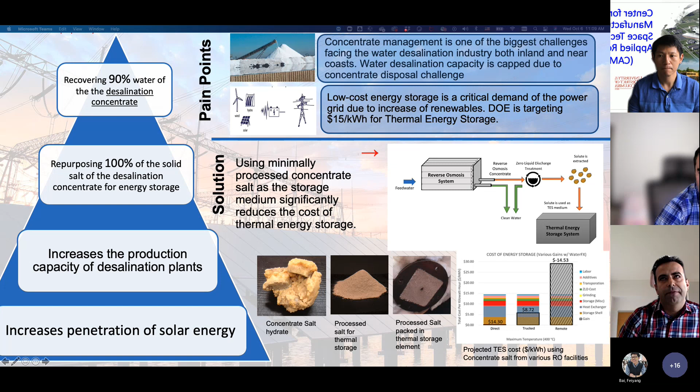If this project is successful, it will lead to more capacity for desalination plants, and it will also lead to cheaper solar energy. Now I'm going to dig more into each of these problems that we're trying to solve here.

The change in salinity affects the pH, of course, and it harms the wildlife. Without access to the ocean, concentrate disposal is a bigger and more expensive problem. The cost of disposal in areas without ocean access can be from 5 cents to 25 cents per gallon, according to Inland Empire Brine Line, a company that disposes of brine in Southern California.

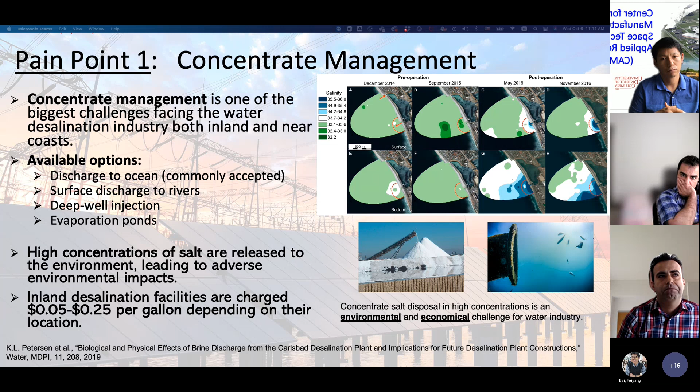Now I switch gear and talk about a totally different subject, and that's the need for low-cost energy storage. As you know, the future power grid will rely on intermittent renewable sources as we move towards more solar and wind. For example, California and 10 other states are targeting 100% renewables by 2050.

In fact, California requires an additional 50 gigawatts of long duration storage for keeping the power grid stable, because there are two different issues here. One is the intermittency of the source of the power, and the fact that there is overgeneration in the grid during the solar hours, and the need for storage during the peak hours.

A storage device that we could have like this would store the excess energy, whether it's solar or excess electricity in the grid, or the industrial heat that is wasted from a power plant, that can be stored in a device which can later on either generate electricity or generate heat for use.

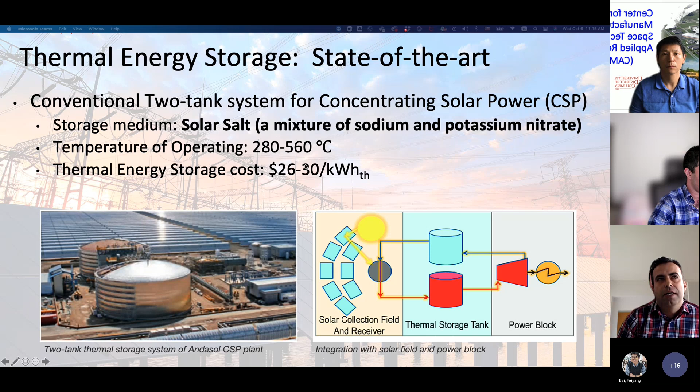Now, there are some emerging technologies which are very interesting to me, and it shows that there are some potentials for marketability of devices that store energy.

So the emerging technologies in the field of thermal energy storage are developed by both big companies such as Siemens and small companies such as Element 16. They are vastly different in size, but they develop, or are developing, energy storage systems that are very similar. This fact suggests that there's a good market potential here.

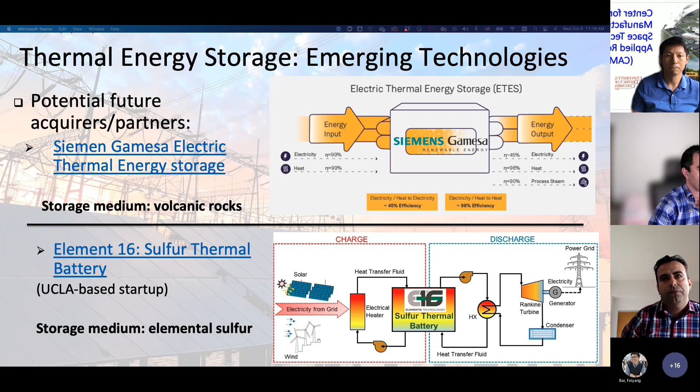So now moving on to the market trends for thermal energy storage. Market forecasts suggest that the thermal energy storage market, both in the US and globally, will steadily grow over the next decade. This fact creates a huge potential for projects that try to use thermal energy storage.

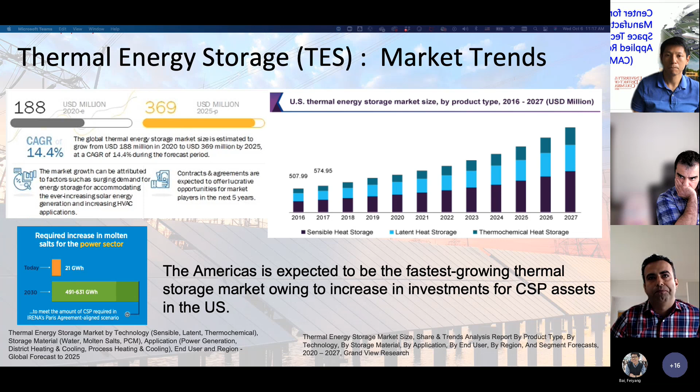Okay, so this slide kind of shows under the hood of what we're doing in our project and how we repurpose the concentrate salt for thermal energy storage. So the desalination concentrate is introduced to a zero liquid discharge system, which will reclaim additional water.

So if this is our reverse osmosis facility, the feed water enters, and the brine or the concentrate is received here. There's good water generated, which is not really what we care about at this point. We get the waste here, we further process it through zero liquid discharge, get additional water, and extract the solid salt.

Then the solid salt is processed in a series of steps to enhance the heat transfer and thermal characteristics of it, both to increase and decrease the thermal conductivity for different layers inside the salt tombs. The processed salt is added to a corrosion-resistant concrete, and a heat exchanger is implemented in the salt, as you can see schematically here. The salt and the heat exchanger are sealed to form a thermal energy storage module, or a salt tomb, as we call it.

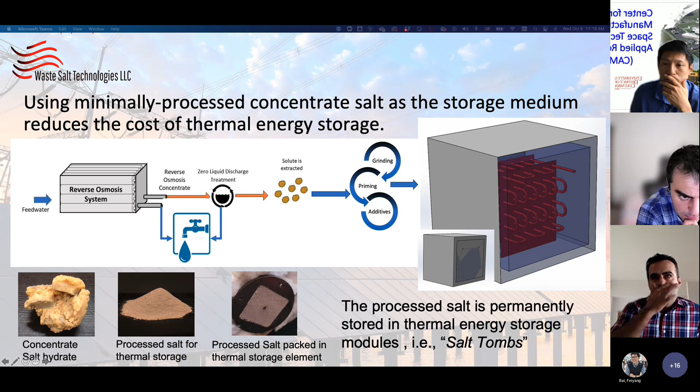Okay, so to wrap up, there are good benefits of using concentrate salt as a thermal energy storage medium because it saves the planet, it prevents desertification, and it enables very low-cost energy storage. We can repurpose it by minimally processing it and storing it, preventing it from releasing to the environment. It has inherently negative cost because there are no major applications for the concentrate. In fact, it's a waste material that companies pay for the disposal.

But the salt is very highly abundant, of course, inside the concentrate, and it's very chemically stable. Some of the salts extracted from the concentrate go through phase change from solid to liquid at different temperature ranges, and that provides higher energy storage density.

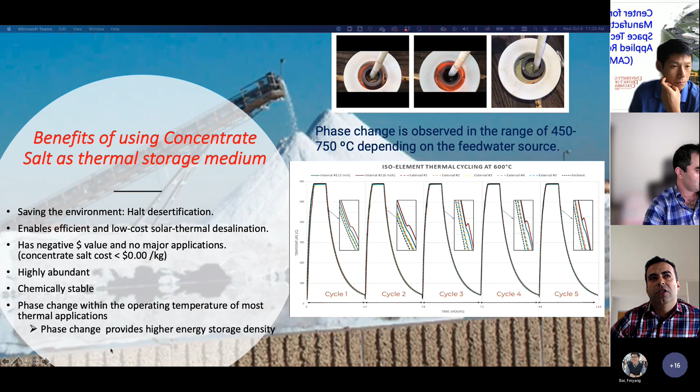Okay, in this slide, I would like to provide the history and vision of the project, where we started and where we are. We started testing the feasibility of using concentrate salt as a thermal energy storage medium back in 2018 with the support of a Bureau of Reclamation Science and Technology grant.

We expanded our work after receiving an additional grant from the Bureau of Reclamation to develop a lab scale demonstration and further refine our techno-economics model. At this point, we are trying to raise money, apply for funding so that we can have a pilot scale demonstration of this concept. And that's something I'm currently working on.

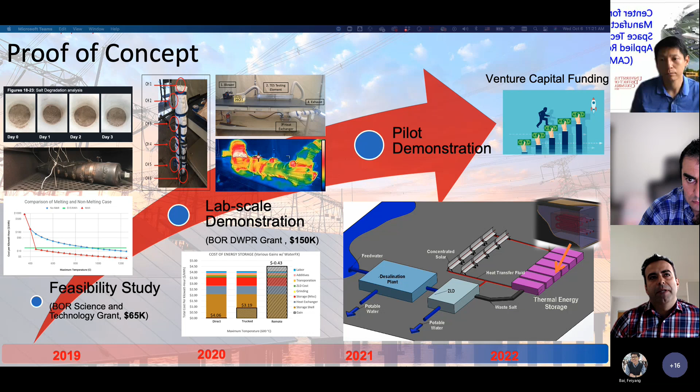So now a little bit more on techno-economics and why it makes sense economically to do this. The cost of any thermal energy storage system you can imagine will include the cost associated with the storage material and the cost associated with the containment.

If we imagine water as a storage medium, which might seem obvious, the cost of the containment will be very prohibitive at high temperature, while the cost of the water would be very small. In the conventional solar salt systems, the cost of the material dominates the cost of energy storage, while the cost of the containment is a lot smaller compared to water due to lower vapor pressure of salts compared to water.

Concentrate salt or waste salt after processing has a negative cost because we essentially receive that waste brine, waste concentrate, and charge the desalination companies. It has a negative cost that reduces the cost of thermal energy storage, even if the required processing costs of preparing the waste salt are considered. In the next slide, I'm going to put real numbers on these charts so you can get a better understanding.

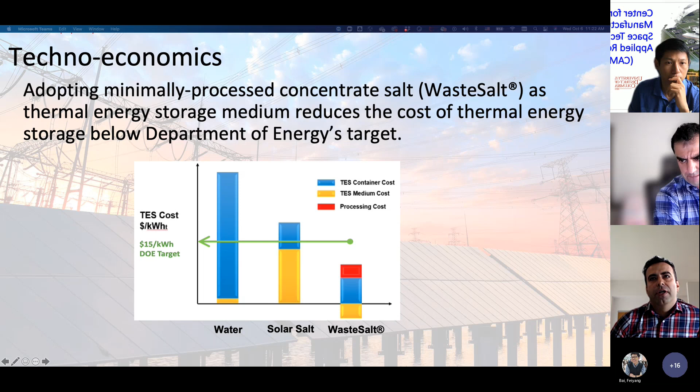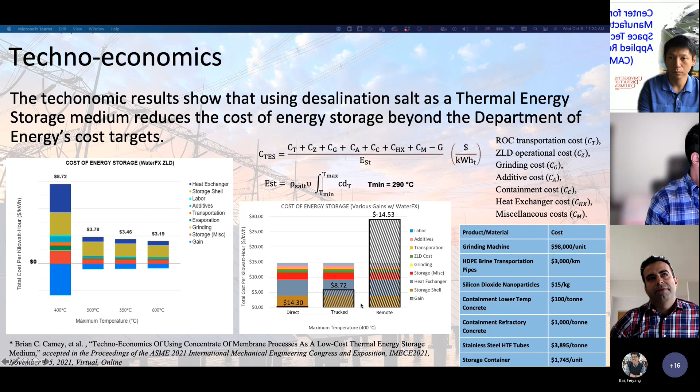And as it creates here, the cost of the thermal energy storage can be offset using this gain.

So we also did a lot of salt characterization on different salt samples that we received from different locations within Southern California, and we sent the samples for water chemistry analysis. We observed that the concentrate salt, which is a eutectic salt, melts at different temperatures. Some samples melt around 450 degrees C, some samples melt around 650, and some samples did not even go through any phase change. And that's something that is interesting for us to observe.

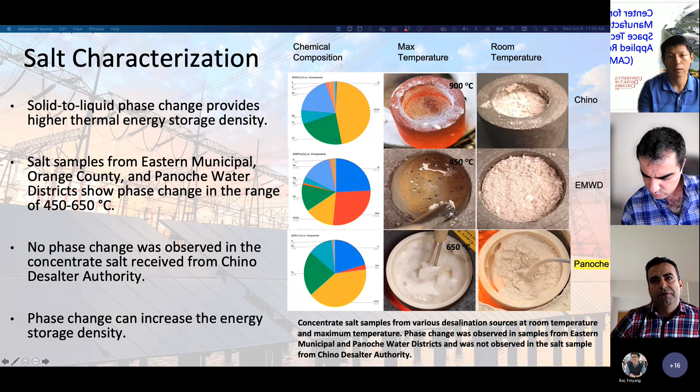Now, the thermal physical properties of this waste salt in our work are either measured or estimated. In order to estimate a value for heat capacity, heat of fusion, and density of the waste salt, we developed a statistical model to predict the ballpark of properties based on the salt mixture.

Sure, no problem. I was saying that in order to estimate a value for heat capacity, heat of fusion, and density of the waste salt, we developed a statistical approach and found the weighted average of the properties based on the salt mixture composition. We also performed thermal testing on various concentrate salt samples to measure the temperature range of phase change for each sample, and this is an ongoing effort.

We identified two commercially available tools that are very helpful for us, and they can help us obtain the thermophysical properties of different salt mixtures. OLI will provide us with the composition of the solid salt if we have the water chemistry of the concentrate. Depending on the pH, there's a lot of chemistry and chemical engineering involved, which we're relying on OLI for. And from there, ANSYS Granta database provides a lot of thermophysical properties for salts, which we are also using.

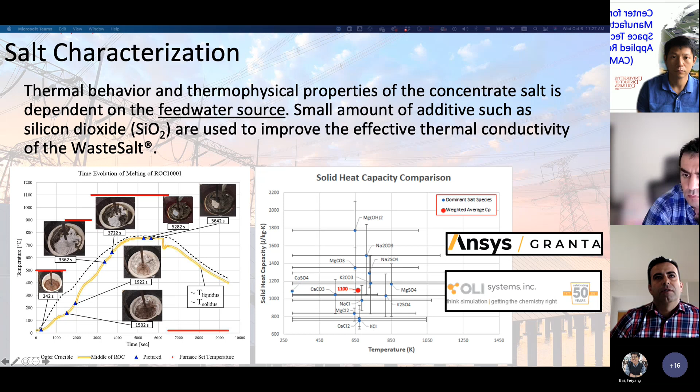In the lab scale, we did one lab scale demonstration, and we're working on the second one already as we prepare for the next phase. In the lab demo, we developed and tested a 5 kilowatt-hour system that stores thermal energy in a single element configuration.

We received reverse osmosis concentrate from Eastern Municipal Water District, extracted the solid salt, and packed the salt in a storage tube right here, then configured a test setup. They wrapped everything around with insulation and tested the system in a cyclic manner, looking at the behavior of the salt after each test.

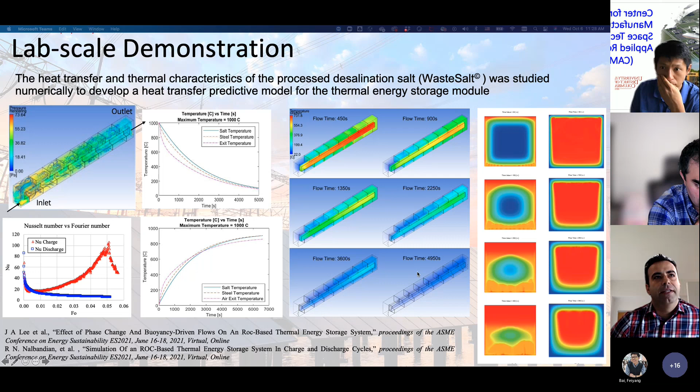In parallel, and this is most of the work that was done during the pandemic, we worked on simulating this lab scale demo, and also looked into the phase change process that happens inside the tube, because we know that the salt in the storage element here melts at about 450 degrees C. So we developed a computational model for that cross-section area of the tube.

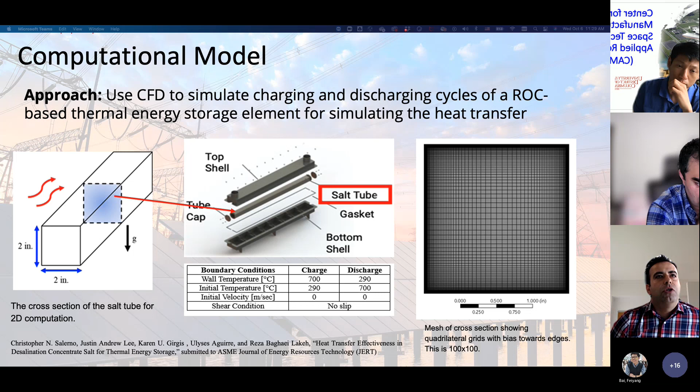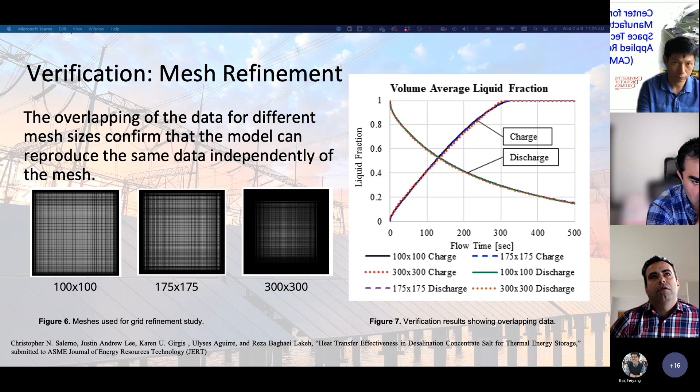This is the work that two of my students worked on, Justin and Chris. They used ANSYS Fluent to solve the governing equation of the flow, and they did some verification using mesh refinement, grid refinement, and also some validation comparing the computational results with the lumped capacitance method, and the agreement was good.

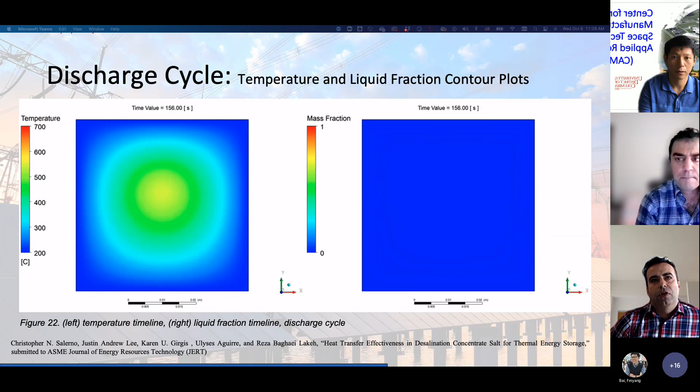So we could model the phase change process inside the tube and get an idea about how effective the heat transfer can be for this thermal storage process. One thing we learned here is that there is a need for treating the salt with low-cost additives to enhance the thermal conductivity and reduce the charge time.

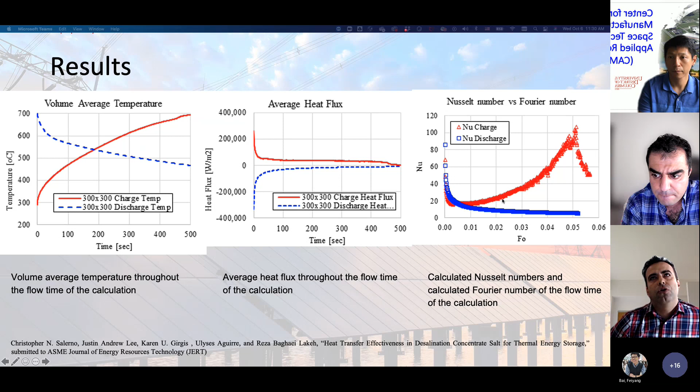So we got some non-dimensional analysis to characterize the convection currents inside the tube, and we also did some analysis on what would be the lifetime of a system made like this. We concluded that the major failure that could happen in a system like this is by corrosion of the heat exchanger element. That's the major failure that could happen.

By adding some corrosion resistive linings to common alloys like stainless steel, we hope to reach low corrosion rates and have a lifetime of about 20 years. Even after one of these salt tombs fails, the only thing that should happen is that the tomb is opened, the salt is maybe processed again, and an additional heat exchanger is added right inside the tomb. So there is no need for replacement, the salt can be repurposed again for the same purpose.

Now, in our next phase, we're collaborating with WaterFX, which has a solar desalination facility already in Panoche, California, located right here in the middle of the state. I don't know if you've been to Central California or not, but it's nothing like the beaches. It's agricultural land, and it has a lot of water shortage issues.

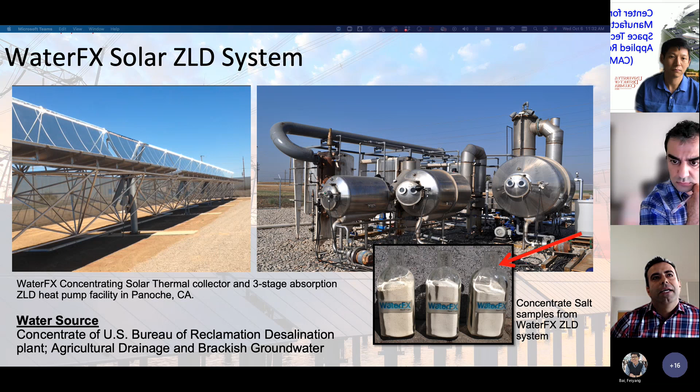This demo of WaterFX is already done there, but one of the major problems, and the reason their economics didn't work, was that they didn't know what to do with the salt they generate, and that led to excessive cost burden for the solar ZLD technology. So we hope that integrating salt tombs as a thermal energy storage module will create a path for the waste salt to be directly repurposed on the spot or sent to other applications.

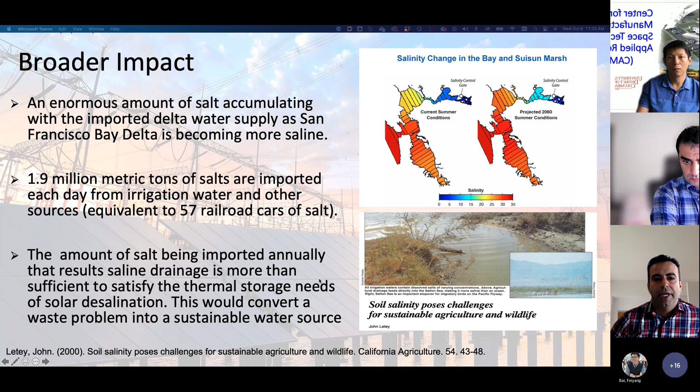Another broader impact I want to bring up before I conclude: there is a lot of water in California brought from the Delta, the San Francisco Bay Delta area, through the California Aqueduct. So a lot of water in the Central Valley and Southern California comes from the north. The problem is the salinity of the San Francisco Bay is increasing as inland water input is reduced and more ocean water diffuses into the bay. That salt from the ocean reaches Central California and is already increasing salinity in this area. For this reason, agricultural runoff water needs to be treated so it doesn't destroy the environment there, and this project can potentially help with that as well.

This has actually been one of my most rewarding projects since I started my career. We filed two provisional patents, published several papers, and won the Best Research Project award at the California State University competition. We aim to continue this work, moving from bench to pilot scale as the next step.

Thank you for your consideration and for hearing my presentation. I would be happy to answer any questions you may have.

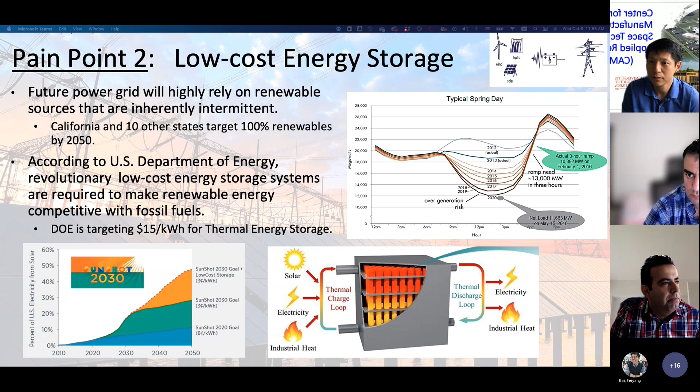I see two more questions here. One is asking, at the end of the thermal energy storage life cycle, can the salt be reused in a new device? Yes. After the lifetime of the module is over and there's a failure caused mostly by corrosion, the salt can be reprocessed, maybe repacked, maybe additional salt added, but it can most likely be repurposed. In fact, the deposits on the metallic heat exchanger surface from the salt will improve thermal characteristics and increase the effective thermal conductivity, so it will have its benefits as well.

There's one more question about the additives - was the additive mainly to lower the thermal conductivity or the melting point of the solution?

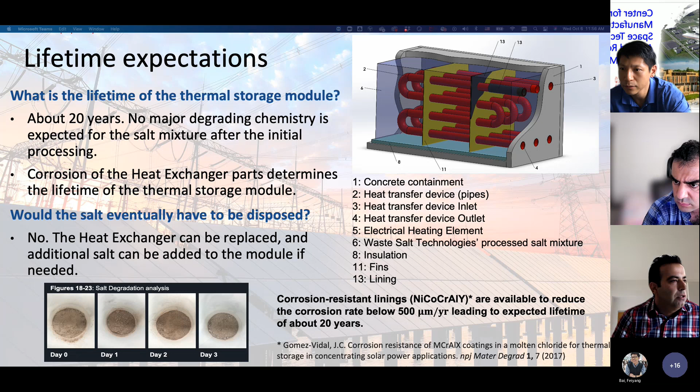Good question. We treat salts in two different ways because of the new design we're having, which has an inner layer and an outer layer. The inner layer is treated to have more thermal conductivity where the heat is stored, and the outer layer is treated to have lower thermal conductivity to act like an insulator. This is not a chemical process - it's just adding silicon oxide or some nanoparticles or aluminum oxide to increase the thermal conductivity, and some rubber-based additives to the salt to reduce the conductivity.

Another question: can we guarantee that this new device helps reduce pollution? I hope so. I really hope so. I don't know, but I hope so. That's part of the research, right?

No guarantee. Dr. Reza, as you can see we have lots of interest in your research, so that's a very good suggestion, Dr. Shu. We'll again ask Dr. Lakeh to present later with the new project, because I'm personally very excited about what you presented, and it matches well with what Dr. Shu has experience in with nanofluids. I was expecting he'd have questions, but it's very exciting. Hopefully we keep this momentum and collaboration alive, and bring you back to campus to see our facility for further collaboration.